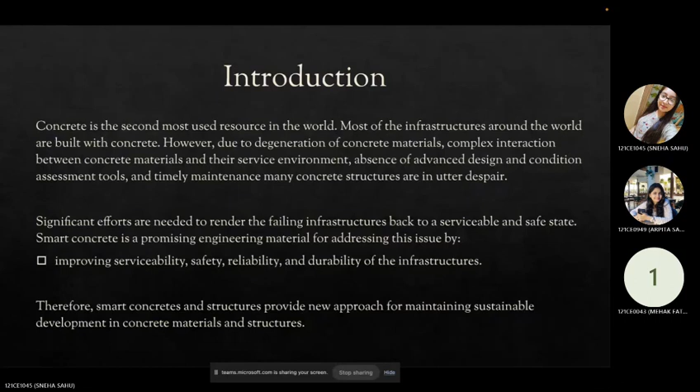Now, what are smart materials and structures? Smart materials, also known as intelligent materials or responsive materials, are created materials with one or more properties that can be significantly altered in a controlled manner by external stimuli such as stress, moisture, electric or magnetic fields, light, temperature,

pH, or chemical compounds. Now, some features that make them distinguished from other materials are transiency, immediacy, self-actuation, selectivity, and directness. Transiency is the response to different stimuli and situations in various states. Immediacy is the response to the external effects without wasting time.

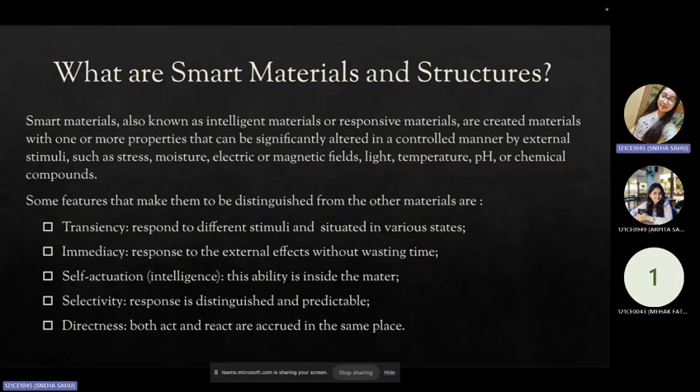Self-actuation or intelligence is the ability that is present inside the matter. Selectivity is the response to distinguish and predictable. Directness, both act and react occur in the same place. A smart material or intelligent structure is essentially a structure with built-in smarts.

This is achieved by integrating several key components, and the first is the smart materials. The substance undergoes a real observable change in order for it to be considered smart. For example, shape memory alloys are used, which can return to a predefined shape after deformation, potentially repairing minor cracks.

Sometimes piezoelectric materials are used to generate electricity when stressed, enabling self-powered sensors. And self-healing concrete is also used, which contains capsules that release healing agents to mend cracks. Now, sensor networks. These are embedded throughout the structures to monitor its health and performance.

Control system. These are used to analyze sensor data and trigger actions such as activating dampers to counter vibrations during an earthquake. So the smart materials are divided into two main categories: passive smart materials and active smart materials.

Passive smart materials are able to transfer some types of energy, whereas the active smart materials are divided into two types. The first ones alter their characteristics on exposure to external effect. The others can change energy from one form, that is thermal, chemical, nuclear, mechanical, to another form.

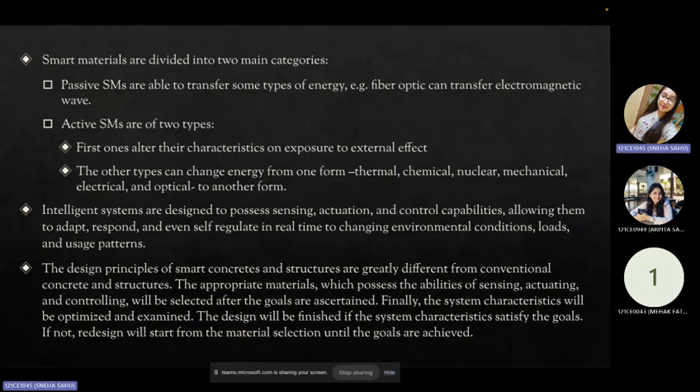Now, why do we need such kind of structures? These structures built with intelligent materials can sense external loads, assess the internal stresses and damage caused by the loads, and respond appropriately if necessary.

The most probable candidates for the initial application of these materials are high performance structures such as skyscrapers, including intelligent buildings, bridges, and those facilities where failure presents large safety concerns, such as nuclear waste containment vessels, bridge decks and dams, and structures under construction.

So, integrating these intelligent structures and materials often offers significant advantages. The advantages can be enhanced structural resilience, improved safety, reduced maintenance costs, increased sustainability, and lifespan extension. Overall, intelligent structures and materials represent a major leap forward in civil engineering.

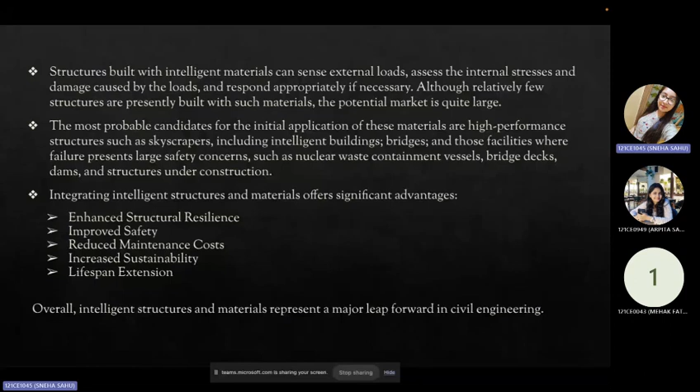Now we will discuss the past research works that have been done in this field in the past few decades. The field covers a wide range of topics, including smart materials, sensors, actuators, control systems, and structural health monitoring. Integration of interdisciplinary knowledge from fields like material science, mechanics, control theory, and computer science drives innovation in intelligent structures.

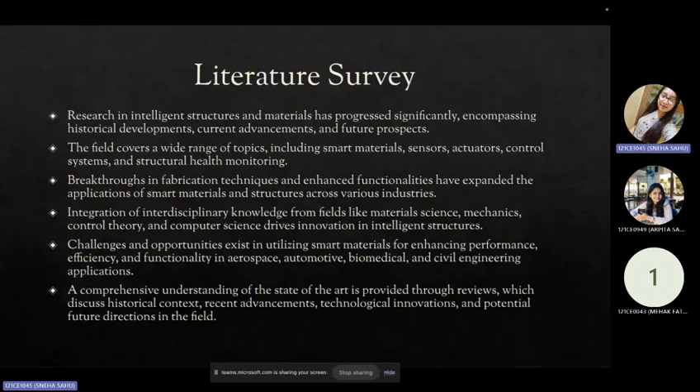Challenges and opportunities exist in utilizing smart materials for enhancing performance, efficiency, and functionality in aerospace, automotive, biomedical, and civil engineering applications. A comprehensive understanding of the state of the art is provided through reviews, which discuss historical context, recent advancements, technological innovations, and potential future directions in the field.

So in Japan, from July 1987 to November 1989, the Council of Aeronautics, Electronics, and Other Advanced Technologies of the Science and Technology Agency supported a discussion on intelligent materials, and an attempt was made to study this new concept from the perspective of professionals representing a broad range of disciplines.

The concept of smart concrete and structures was first proposed by Japanese researchers in the late 1980s. Since then, Yanagida of the University of Tokyo developed self-test concrete by involving glass and carbon fibers into the concrete in 1992.

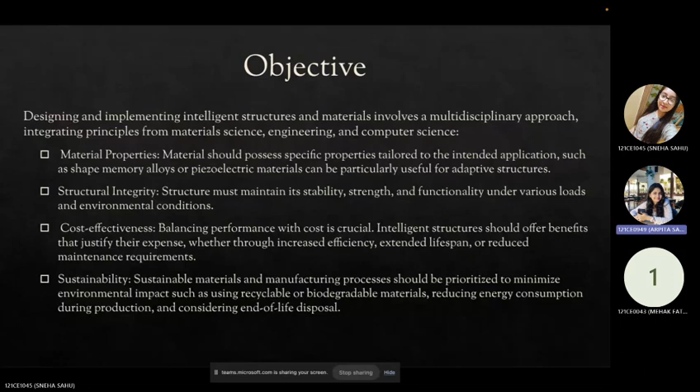Structures must maintain their stability, strength, and functionality under various loads and environmental conditions. Now, cost effectiveness also plays an important role. It is important to balance performance with cost such that the efficiency and lifespan is extended and maintenance requirements are reduced. Sustainable materials and manufacturing processes should be prioritized to minimize environmental impact, such as using recyclable or biodegradable materials, reducing energy consumption during production, and considering end of life disposal.

Adaptability to environment conditions. Intelligent structures should be able to adapt to changing environment conditions such as temperature fluctuations, moisture levels, and external loads. Embedding sensors and actuators into the structure enables real time monitoring and control, facilitating adaptive responses to changes in the environment or operational conditions. Intelligent structures often rely on sophisticated algorithms to process sensor data and make informed decisions. This involves developing algorithms for data fusion, pattern recognition, and predictive modeling to optimize performance and efficiency.

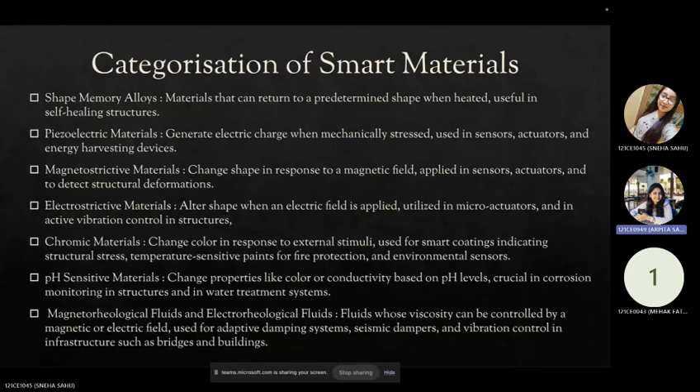Chromic materials change color in response to external stimuli, and pH sensitive materials change properties like color or conductivity based on pH levels. They are crucial in monitoring corrosion in structures and in water treatment systems. Electrorheological fluids are the fluids whose viscosity can be controlled by a magnetic or electric field, used for adaptive damping systems, seismic dampers, and vibration control in infrastructure such as bridges and buildings.

The classification of smart structures and concrete includes self-sensing concrete that is able to sense concrete conditions and environmental parameters such as stress, strain, crack, temperature, and humidity. These are also called self-monitoring or self-diagnosing concrete. Self-healing is the ability of concrete to repair its cracks autogenously or autonomously. Self-healing of cracks in concrete contributes to a longer survival life and makes the material not only more durable but also more sustainable. Self-adjusting is the ability to respond to loading or environment conditions for the remaining capacity of concrete.

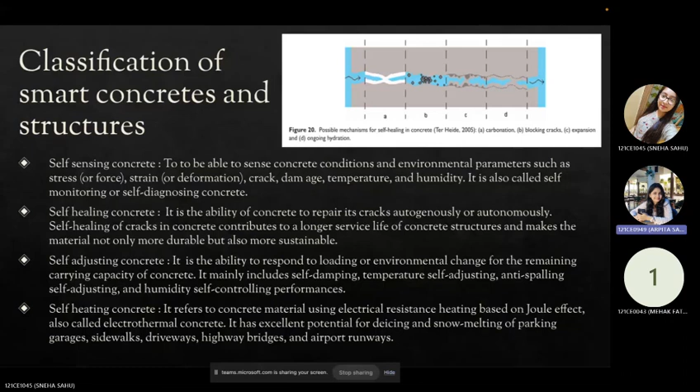Self-heating refers to concrete material used in electrical resistance heating based on Joule effect, also called electrothermal concrete. It has excellent potential for de-icing and snow melting of parking garages, sidewalks, driveways, highway bridges, and airport runways. Self-cleaning property of concrete means the ability of effectively resisting wetting by water and aqueous solutions or diminishing air pollution and pollution on the concrete surface. Electromagnetic shielding or absorbing concrete can reflect or absorb EM radiation, which thereby acts as a shield against the penetration of the radiation through it. These are done by introducing conductive fillings and ferromagnetic materials.

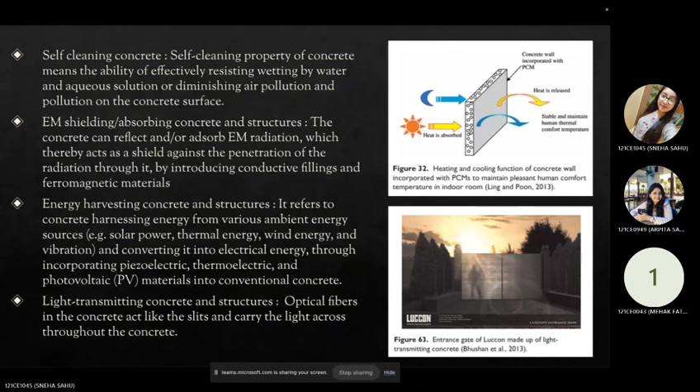Energy harvesting concrete refers to concrete harnessing energy from various ambient energy sources. Light transmitting concrete uses optical fibers in the concrete that act like slits and carry the light throughout the concrete. Now we come to sensing and actuation. These terms have been used multiple times in this presentation. What it actually means is that intelligent structures and materials can be equipped with sensors and actuators that enable real-time monitoring and response to external stimuli, enhancing their functionality, performance, and resilience. Strain gauges, fiber optic sensors, piezoelectric transducers, smart materials, and wireless sensor networks are a few of the sensors and actuators used to perform this operation.

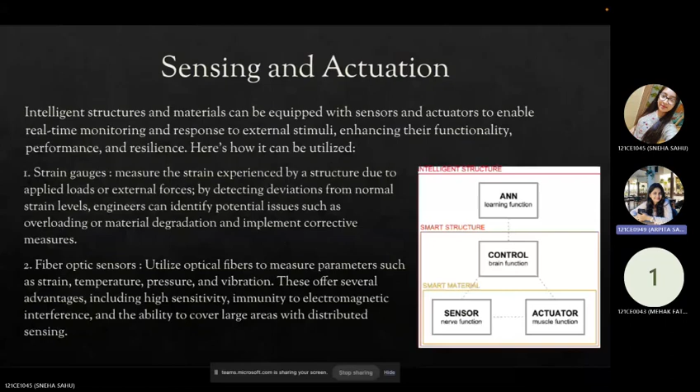Now, I would like to call my friend Mehak to talk about control of smart structures.

Hello everyone. I'll continue with the control of smart structures.

Control systems play a crucial role in managing and optimizing the behavior of intelligent structures and materials by providing real-time monitoring, feedback, and adjustment mechanisms. Here's how control systems contribute to this process. Real-time monitoring. Control systems continuously monitor various parameters such as structural stress, temperature, humidity, and environmental conditions using sensors embedded within the structures. This data is collected and analyzed to assess the current state of the structure and detect any deviations from desired performance criteria.

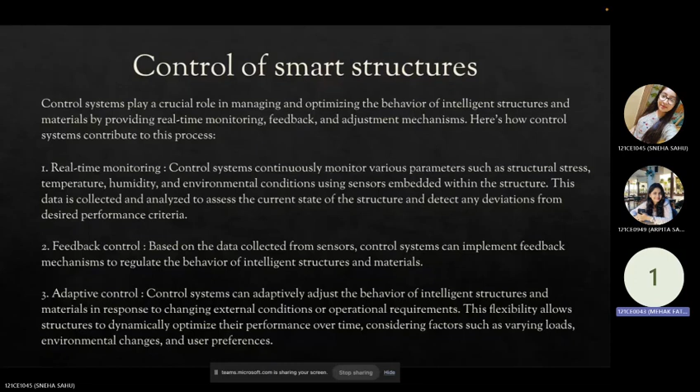Next is feedback control. Based on the data collected from sensors, control systems can implement feedback mechanisms to regulate the behavior of intelligent structures and materials. Then we have adaptive control, in which the control systems can adaptively adjust the behavior of intelligent structures and materials in response to changing stimuli. This flexibility allows structures to dynamically optimize performance over time, considering factors such as varying loads, environmental changes, and user preferences.

Next is optimization algorithms, in which they utilize optimization algorithms to analyze sensor data and determine the most efficient strategies. Integration with actuators. The control systems often interface with actuators embedded within intelligent structures to implement corrective actions or adjustments in real time. Remote monitoring and control. In some cases, control systems allow for remote monitoring and control of intelligent structures that enable engineers to monitor the performance, diagnose issues, and implement adjustments from a centralized location.

Overall, the control systems serve as the brain of the intelligent structures and materials, enabling them to dynamically adapt, optimize, and respond in real time.

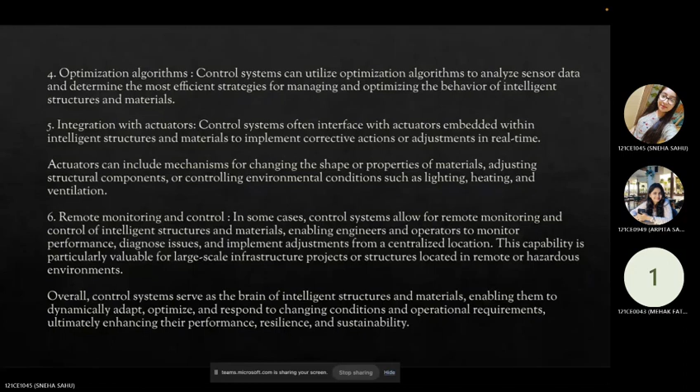The energy generating smart bridge in the Netherlands. This bridge incorporates piezoelectric elements within the concrete structure. They harness the kinetic energy generated by pedestrians and vehicles crossing the bridge, converting it into electricity to power nearby streetlights and other infrastructure. The Salerno Maritime Terminal in Italy features a sculptural roof made from fiber reinforced concrete, which incorporates fibers such as glass, steel, or synthetic materials to enhance the concrete's properties.

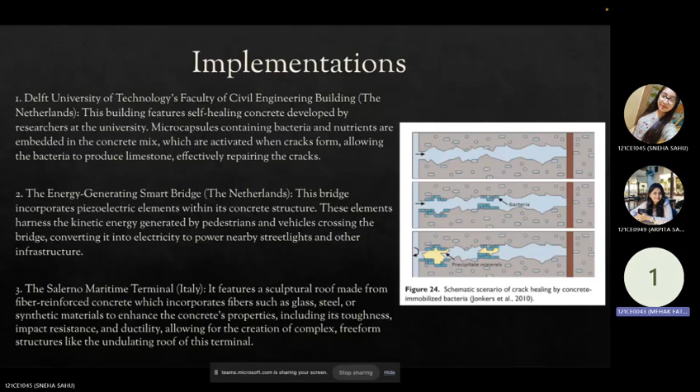Next examples, we have the Parkview Green FangCaoDi in Beijing, the Druk White Lotus School in Ladakh, the University of California, San Diego, and the Hestia Community Center in Norway.

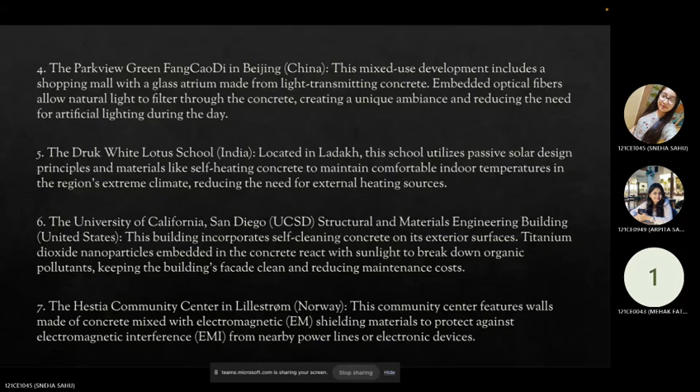Next, we come to the challenges faced in the development and application of such smart structures and materials. The major challenge to building and using a comprehensive sensor system is that a variety of physical parameters must be measured. Sensing and data processing are complicated because most of the measurements exhibit dynamic behaviors with time scales, and also modern data acquisition hardware can collect enormous amounts of data, yet only a small fraction may be useful.

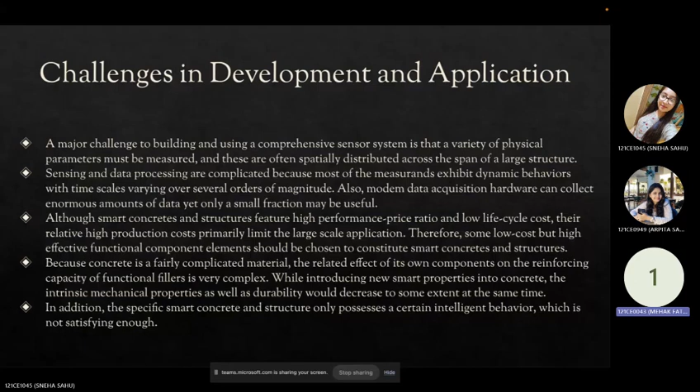Although smart concretes and structures feature a high performance-price ratio and low life cycle cost, their relatively high production cost primarily limits large scale application, and therefore some low cost but effective functional component elements should be chosen to constitute smart concretes and structures. Because concrete is a fairly complicated material, the related effect of its own components on the reinforcing capacity of functional fillers is very complex. In addition, the specific smart concrete and structure only possess a certain intelligent behavior, which is not satisfying enough.

Now, we come to the future prospects of smart concretes and structures. The development of multifunctional, multidirectional, and compound smart concretes and structures will be the main driving force in this area in the future. In future works, much effort should be invested in developing more comprehensive and precise constitutive models forecasting the smart behaviors of smart concretes and structures based on experiments and numerical simulations.

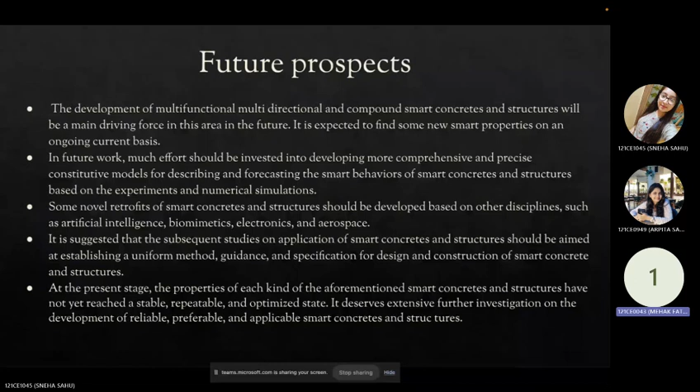Some novel retrofits of smart concretes and structures should be developed based on other disciplines such as AI, biomimetics, electronics, and aerospace. It is suggested that subsequent studies on application of smart concretes and structures should be aimed at establishing a uniform method, guidance, and specifications. At the present stage, the properties of each kind of the aforementioned smart concretes and structures have not yet reached a stable, repeatable, and optimized state. It deserves extensive further investigation to achieve the same.

Now we come to the conclusion. To conclude, the ultimate extent to which structures are built with intelligent materials depends on the technology having positive economic, engineering, safety, and cost benefits. Early applications could include large structures such as skyscrapers, intelligent buildings, which would incorporate fiber optic sensing systems into the conventional fiber optic communications network.

An intelligent building system would control internal and external telecommunications, security systems, heating, ventilation, etc. At the same time, it would also measure the wind and, in some cases, earthquake loads on the building, delegating the appropriate responses, such as activating active anti-vibration systems.

The intersection and integration of these approaches promise great benefits, especially for the purposeful design and programming of new behaviors of spatial structures. Buildings and spaces equipped with such active programs will be more responsive and adaptive to new functions and uses, and more resilient to volatile changes of environmental and social conditions.

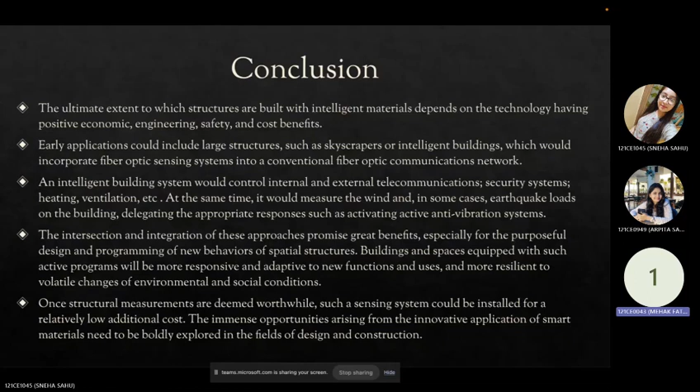Once structural measurements are deemed worthwhile, such a sensing system could be installed for a relatively low additional cost. The immense opportunities arising from the innovative application of smart materials need to be boldly explored in the field of design and construction.